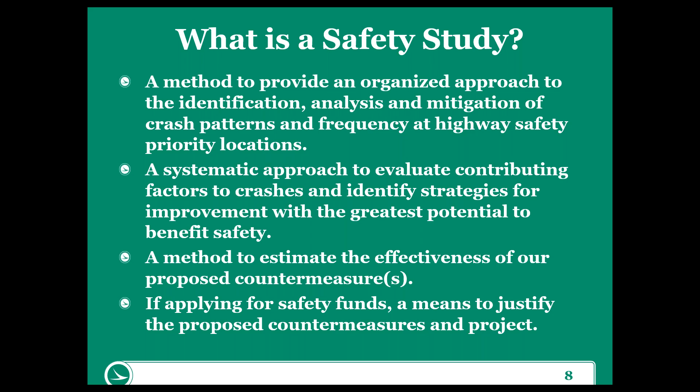And really importantly, if you're going to be applying for safety funds, the safety study really provides that means or that backup, that justification for the safety funding specific to the proposed countermeasures and the project that will move forward into the next stages of project development.

So the procedure for safety studies, this really applies to all studies. The first is to start with identifying your problem and your goal. So typically speaking, when you're dealing with an ODOT study, this is going to be something that's identified either by an ODOT district or someone in the central office safety program, but it can also be something that's identified by an MPO or local government. But really what it needs to be is an area of safety concern with a documented level of safety issue associated with the actual location.

Once you identify your problem and the goal, what you're trying to essentially address, then it moves into that study area definition process. It's really important for us to capture the appropriate study area so that we have a fair comparison of the existing condition to any proposed improvements we might implement. And most importantly, the direct safety impacts of those proposed improvements are important to capture.

This all usually starts with a startup meeting with the district safety review team. The district safety review team is that multidisciplinary committee within ODOT that is going to guide and ultimately will serve to review and approve the recommendations of the safety study. Coordination with the DSRT, and most importantly, if you're an LPA or an MPO, with that local safety coordinator is very, very critical at the beginning of the project, because that's how you're going to set the stage for the district safety team's support of the particular project as you move it forward and get it in front of ODOT for potential approval for some safety funding.

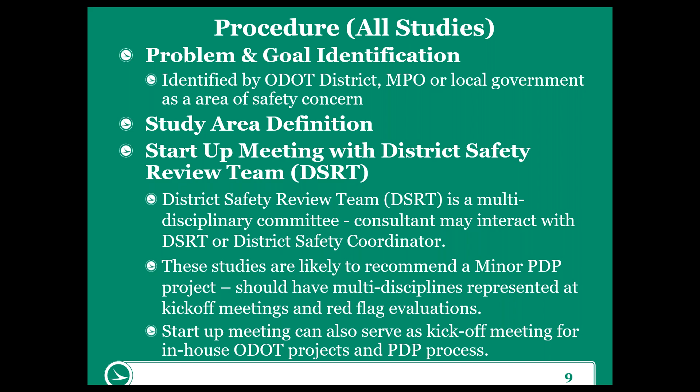What you're going to want to do when you're developing that scope is identify if this is going to be a full or an abbreviated safety study, and this is determined generally by the ODOT district that you're involved with or will be involved with. Please do always coordinate. If you're doing a project for ODOT, that coordination will start from the beginning. But if you're working from an MPO or a local public agency, this is another reason why it's really important to coordinate with ODOT, because you want to make sure that you understand if there have been any previous studies done before. And in certain cases, if there have been, then that might guide the actual scope in terms of whether it's a full or abbreviated study that ODOT really needs to see in order to move forward to make more decisions.

You'll review with that team the study area. You'll then also request the crash data, or in this case, you won't really be requesting it. You have the access to it through ODOT's systems now, so pretty much anybody can get that crash data. But what you will want to do is confirm very early what years of data you need, because as we know, there's some reasons why in some areas we don't include certain parts of data and certain years of data.

Right now, the COVID situation is a big one. In some areas, ODOT is suggesting that year of data 2020 be skipped. There also may be other reasons why you would provide a different number of years of data in terms of the 3-year grouping. Perhaps there was a construction project in the vicinity of the area that you're going to study that could affect the crash data. So you need to have that kind of information, and you need to coordinate that with ODOT, in particular, just to confirm as you're starting that you have the right 3 years of data. And in some cases, up to 5 years of data might be used.

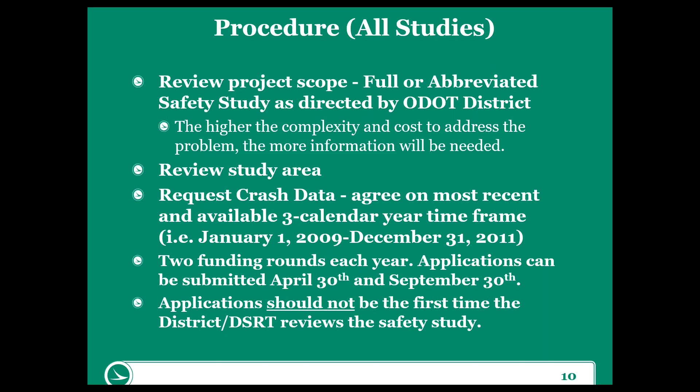Some of these projects are perhaps not on ODOT's safety priority list or are a local priority. The district review team needs to be involved early and often to provide the greatest chance of success in getting that safety funding, and they can't see it as of April 30th or September 30th for the first time. So like I mentioned, if seeking ODOT funds, contact the district safety coordinator to verify the level of effort and schedule for submitting that study and application.

Another point to make, every district is different. So don't assume because you've done a study in District 12 that the schedule District 12 follows is what District 7 might follow. It's really important that you talk to the specific safety coordinator at the district to make sure that you understand what that schedule needs to be. Typically, what we say is that the study should be received by the district at least 3 months prior to the application deadline to provide enough time for

and those submittal deadlines are really April 30th and September 30th, so you can see why we need to back up those dates. You can't be submitting it to district on those dates because that's when they need to turn it around to central office. So you need to back up at least a month ahead of time you're submitting your final study to district so that they can make sure all the T's are crossed and I's are dotted and they're comfortable with the recommendations. And then there's at least a couple months ahead of that that you should be coordinating at a minimum with district. The important thing is consult early and often with district.

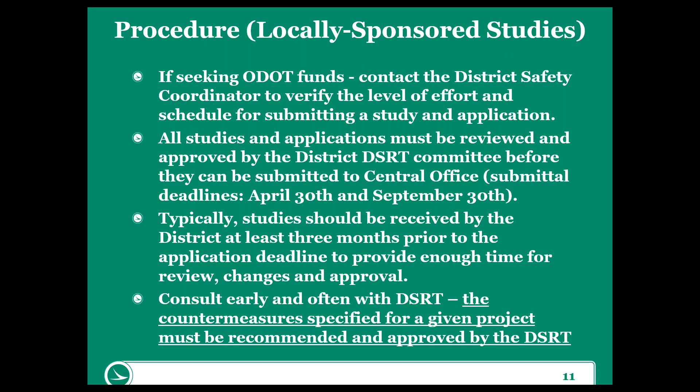They have a great partnership with the local public agencies and really want to share their funding with local agencies. So it should be considered an opportunity to make sure that whatever recommendations come out of any study are supported by the DSRT. And that same recommendation applies also for any sort of studies you're doing for the district. The district safety coordinator is there for your support and your help with them throughout the study development process, because then when it gets to that review time, it's much easier for them to review and approve it, particularly if they're reviewing multiple applications at the same time.

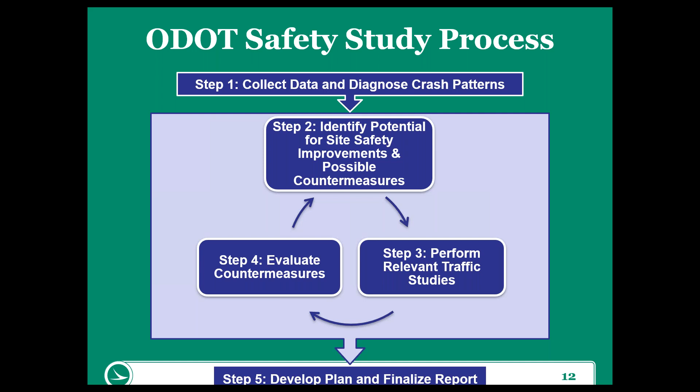So let's continue a little bit more. Again, this is what we're going to touch on today. We're going to go through all of these steps between Alex and myself. We will hopefully hit every single one very thoroughly, and you'll have a confidence level coming out of this course that you can develop a safety study that will be received well by district and by central office.

Another thing I want to point out is throughout the course of this presentation, there will be links shown when appropriate at the bottom of the slides, and those provide you the current link to the page where you can find this information. As you know, ODOT has made changes and updates to their website over the past several years, and sometimes we've bookmarked things and we go back and try to find those locations and we can't. So we've tried to make sure that at least at this snapshot in time, the pages you see on the screen and the things we're talking about, you can find them fairly quickly. You might have to type them in unless you can convert that quickly to some text, like if you have the PDF, but at least you have that link and you can get straight to where you need to be.

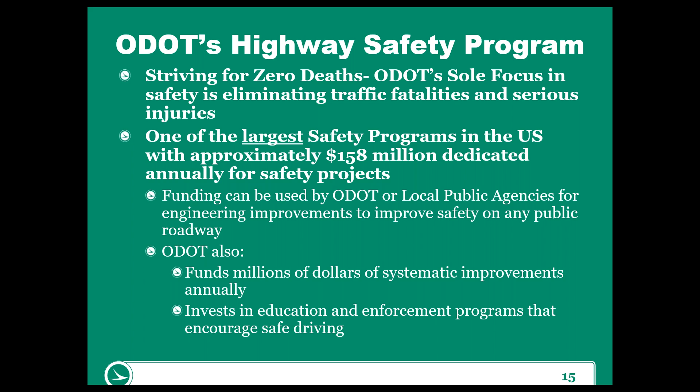A little more background: Ohio's fatalities have traditionally trended down for the past several decades, which is a real win. In fact, in 2013, Ohio had 990 traffic fatalities, which is the lowest number of fatalities since 1936, when ODOT began maintaining records, and shows the success of their safety program. However, from 2014 through 2019, serious injuries continued to trend down, but fatalities have started to rise. There's a lot of potential reasons, but we don't know exactly why that is happening.

But part of it is, they've had a very successful program. So the investments that they've made have really had an impact, and they've taken some of those big heavy hitter issues out of play, and so they're seeing that impact.

And so the effectiveness of some of their treatments has changed a little bit over time, which is natural. If you make progress towards reducing fatalities, that's a good thing. So you're going to see those trends change a little bit.

But we do have a few other things at play. We have a lot of newer, safer vehicles. So what that means is the severity of crashes is going down. If you look at from 2014 to 2019, the serious injuries, that's really a direct result in part because of the safer vehicles.

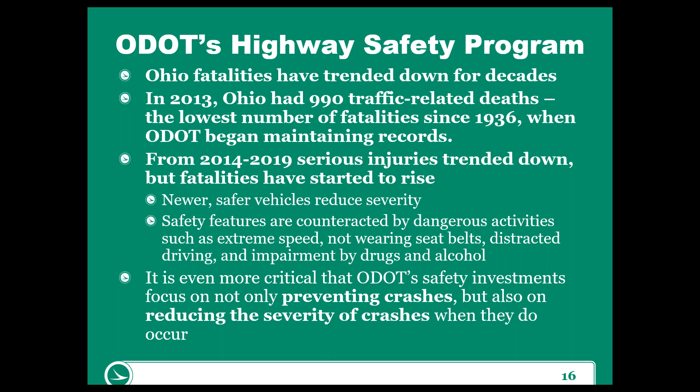So our job is that much more challenging. We have to try to counteract the behavior of individuals, but we also want to make sure that we're building into our environment, into our roadway systems, treatments that not only prevent crashes, but also minimize the impact of crashes.

And one of the methods that they have decided to use to get them a little bit closer, to move them to that point where they can walk away and say, hey, we have done a great job and nobody's getting hurt on our roadways, is to use the Highway Safety Manual.

The Highway Safety Manual is something that has come about over the past 10 to 15 years. It is providing some technical background on what we call the basic science of crashes. It gives you an overview and information on safety management methods and approaches. So it's helping DOTs guide their safety management practices all the way from identification of priority locations through to the implementation and construction of projects.

It gives us now some methodologies for predicting crashes. Why is this important? Because for many, many years, we had to use crash rates, which look back in order to get a sense of what a potential impact might be for an improvement. But as you're probably thinking, how can you decide what's going to happen when you change something and make something new from information that's in the past and has to do with the old condition? Yeah, that was a challenge.

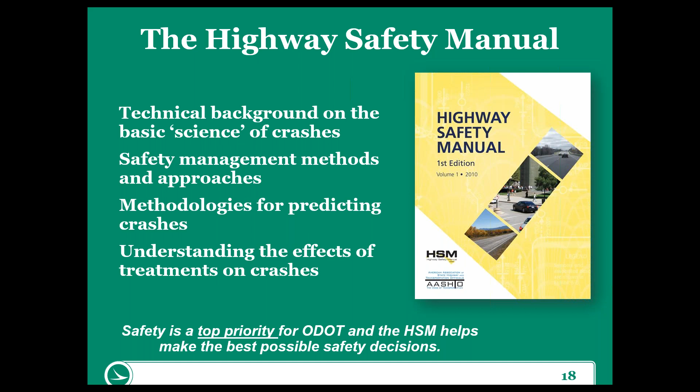Overall safety is the top priority for ODOT, and the HSM is the tool that helps them make the best possible safety decisions. This is something you just need to be aware of.

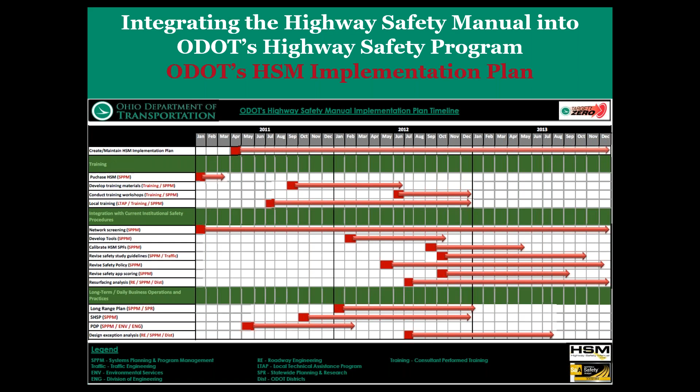When ODOT decided to implement the Highway Safety Manual into their program, they had a very comprehensive plan. The good news is it's been very effectively implemented throughout the majority of the program. In fact, in 2010, ODOT was one of the first states to use the HSM, and also the AASHTO SafetyAnalyst, which is based on the HSM, to prioritize and identify their HSIP priority locations for their studies and funding.

In 2012 - and think about that, that's nine years ago - HSM was incorporated into ODOT's Traffic Academy training.

One of the things I didn't get a chance to do was give my background because of the glitch we had. But just to give you a perspective of where I came from, I've been in transportation, traffic engineering, and highway safety for at least 20 years.

For the past 12 years, I've been working with folks implementing the Highway Safety Manual across the country. I've been involved in HSM training almost since the beginning for ODOT, who have had training courses on the HSM and have been incorporating it throughout their program for close to 10 years now - I've been involved for at least the past 6 or 7. This has been a really strong initiative for ODOT, and we've been doing this Traffic Academy training for quite some time, and I'm pretty excited that it continues to grow.

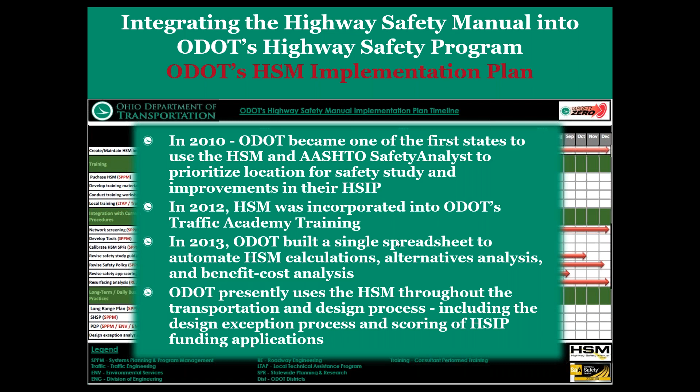For ODOT's safety program priority locations, most of us are familiar with the lists we've seen. ODOT focuses on sites with the most potential to benefit from a safety improvement. They use the Highway Safety Manual to estimate that potential, screening all locations on their system and using the HSM's methods to predict crashes - based on the design that's out there, determining what we'd predict we should be seeing in terms of crashes, and comparing that to what's actually happening. That's how they determine the potential for safety improvement at all those locations.

They think very positively about their program. Locations are identified as priorities because they know that with the right improvements and treatments, there is a real potential to reduce crashes in the future.

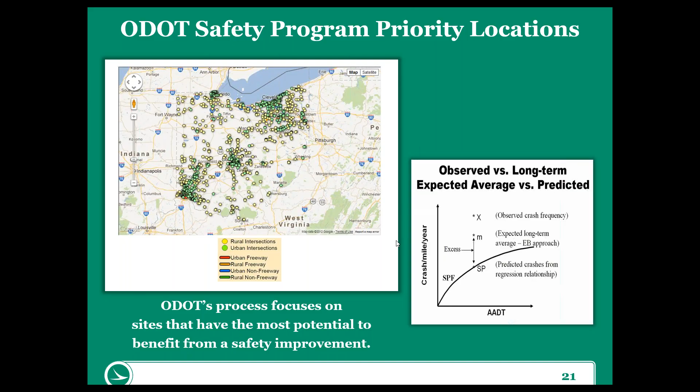Clearly, developing the future lists and new lists has been a challenge because of COVID. But there's also the new location that contains all of the new information on the program and the safety priority locations. What is not there is their highway safety priority list, or at least it wasn't there two days ago when we were looking at this. That information, I'm sure, will transfer over and they'll have it updated at some point in the future. But in the meantime, if you're looking for or wanting to confirm you have the latest lists, definitely reach out to your district safety coordinator.

You can also reach out to the folks at central office as well. My recommendation is always to contact the district safety coordinator first. Give them the first opportunity to give you the information you need, but you can always CC or copy central office so they're in the loop as to what you're requesting.

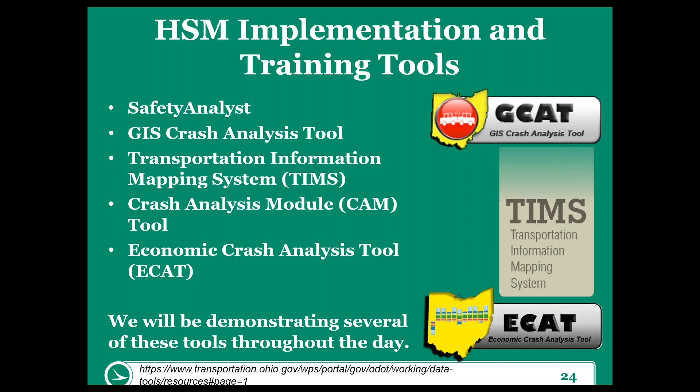As you're going into preliminary engineering and design, you need to use it to refine and identify key elements of the design. For environmental engineering, it can help you with the NEPA process and documenting the purpose and need, and also documenting the choice of alternatives given the potential environmental impacts and other impacts.

And then in final engineering, it's also going to help you further design and refine the design, and do things like value engineering and those types of things.

Now in construction, it does apply, because for those of you more on the design side, just because a project's in construction doesn't mean you can't use or find a way to use the highway safety manual and the safety analysis. If there's a proposed change in construction that might affect design, it's very important that the design engineers and construction engineers go back and verify the reason the decisions were made during the planning and design process, because some of those decisions are influenced by the safety components and safety aspects.

And if you're going to change something when you get to the actual built environment, it could very much have an impact on safety performance and on what you might expect to happen at that site in the future. So anybody who works in the area of design refinements when we get to the construction stage should be aware that the HSM is definitely relevant and informative in helping you develop those next steps for making changes in construction.

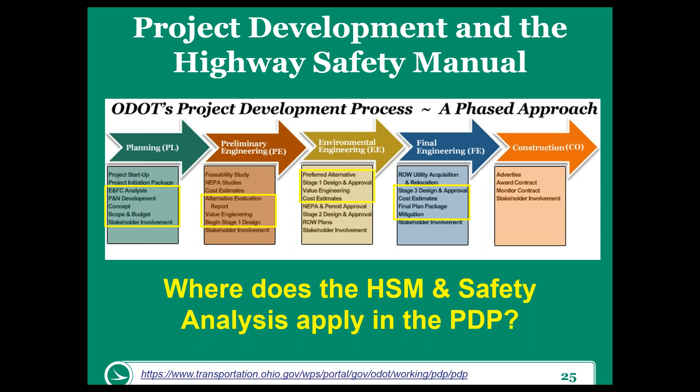So again, where does it apply in the study process? It applies everywhere. The HSM applies when we're thinking about collecting data and diagnosing crash patterns. We definitely need to know what data we need in order to do analysis. So when we're collecting the data, we need to be aware.

It helps us diagnose crash patterns. It's very helpful to see what might be expected at that site in terms of the distribution and types of crashes compared to what's actually happening. When you're getting to the point of identifying the potential for site safety improvements and possible countermeasures, it's giving you some hints and indications on the things that might be most effective. And then most importantly, it tells you what the effectiveness of those potential options are.

When you're performing your relevant traffic studies, you need to keep the HSM in mind as to what you need in order to support the decisions that are being made based on safety. Evaluating countermeasures is similar to identifying potential and possible countermeasures. This is when you get to that final evaluation of your proposed improvements. And then finally, it's woven throughout the development of the plan, the safety study, and finalizing the report. It's very critical that you keep the HSM in mind.

It's a perfect tool for helping you quantify potential impacts, talk about those impacts, and in the last module of this series, we'll talk a little bit more about how you can communicate things more effectively, and the HSM is a great tool for doing that as well.

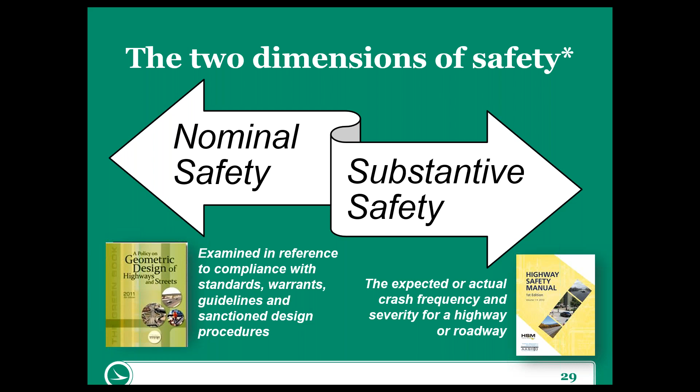So what it considers is that expected or actual crash frequency and severity for the highway or roadway that you're actually looking at, based on the volume, where it's located, the context of that particular design. And it allows us to get much more granular than just a simple yes or no, does something meet a standard or not?

You're going along at a certain presumed level of crash risk, boom, you hit that point in time when you meet that design standard, and then you fall off that cliff and you don't have any crash risk, or have a lot less crash risk, moving forward.

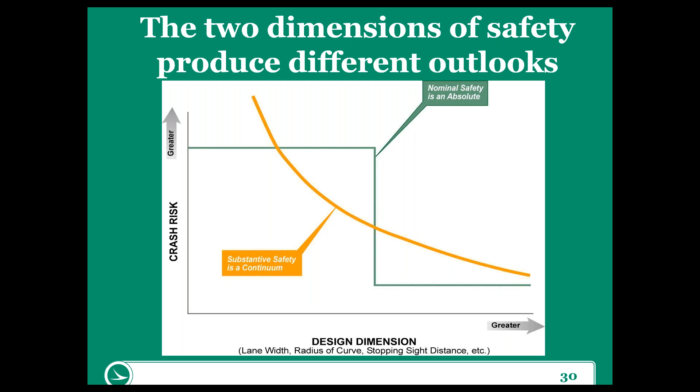Well, that's not reality. The reality is there's a difference in crash risk between a 12-foot, an 11-foot, a 10-foot lane width, and we need to be able to understand that in order to have the most effective and comprehensively formulated design for our proposed improvements, that we hope actually results in a short-term and long-term reduction in crashes and improvement in safety.

So we would expect in this situation to see a lot of different types of crashes, but most likely the most predominant would be the roadway departure, run off the road, lane departure types of crashes. We would also expect in this type of environment to see higher speed related crashes, because these roadways typically have higher speed limits because they're rural. In Ohio, we know that outside of certain municipal areas, there are Ohio Revised Code requirements for the speeds on roads like this. So we know that they tend to be on the higher side.

And typically speaking, if you were to see someone run off the road at a high speed on one of these types of roadway locations, you'd probably expect to see the severities a little bit higher than other locations that have a lower speed and maybe don't have the same type of roadway environment. So clearly, you can see substantive safety and safety in general is very context sensitive.

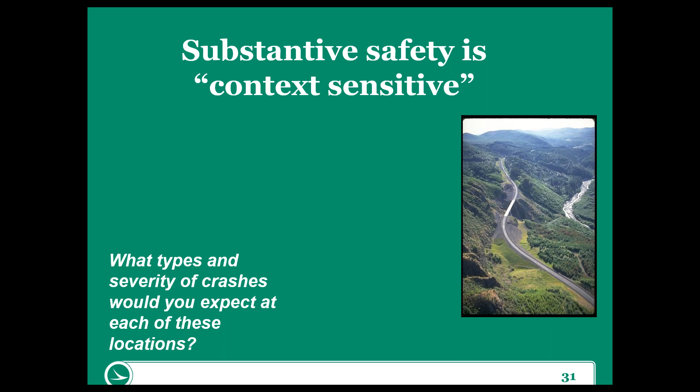We're going to see a very different mix of vehicles. And probably, for the most part, with the exception of those pedestrian and bike crashes, we're going to see a lot lower severity. We're going to see a lot more property damage only crashes when things happen, and a lot lower severity in terms of the impacts in the vehicular crashes.

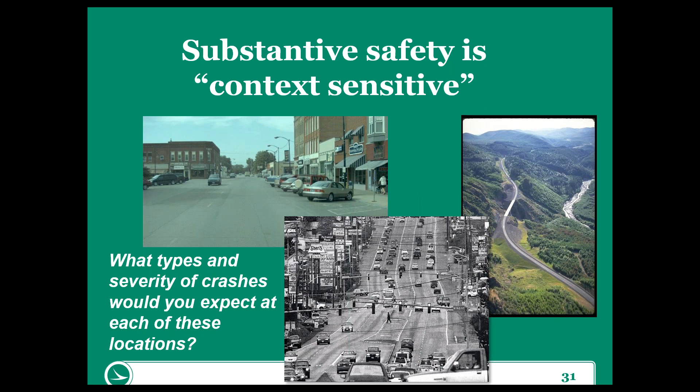Again, more information. Why do we care? Well, a good decision is an informed decision. And as engineers and planners and transportation professionals, we all appreciate that an informed decision really requires data. In fact, most of us are not comfortable in making solid design decisions unless we have some data to back it up. Yes, we use engineering judgment all the time, but typically engineering judgment is based on experience, and it's based on some sort of evaluation of data or information that we've had or used elsewhere. So again, an informed decision and a good decision really does require data.

There's also this kind of implied level of importance. When you have more data and you have more detail and you can get more granular in your analysis, you really have this larger amount of comfort. And so then you put a little bit more importance, a little bit more weight on that information when you're making decisions, you would put a little more weight on those points that have more data.

In the past, all we had for safety was crash rates and design standards. So historically, with the crash data itself, all we could do was look backwards. And as far as looking forwards, all we could do was look at design standards. And like we just talked about, design standards tell us something, but they don't tell us enough. In fact, the reality is a lot of design standards are not based on safety as a primary decision point. We would have hoped that they were, but the reality is they weren't. A lot of design standards are based on the ability for people to operate a vehicle comfortably, but not necessarily consideration of safety within the decision-making process.

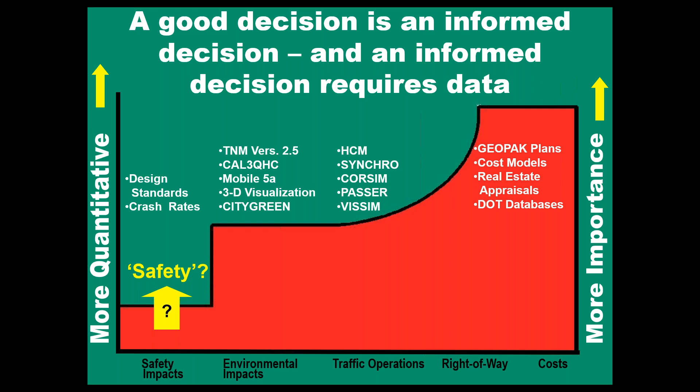But as you look at this kind of graph, you could see moving from left to right, as we get further into the design process, we have more and more detail. We can get more and more honed in on the accuracy of things, and therefore there's an implied increase in the level of importance. So isn't it great that now we can get safety up to that point in the planning and decision-making process, that we can weigh it fairly and equally amongst all of those other planning and design tools that we currently have to help us make those design decisions.

So some typical decisions that impact safety, aside from really saying that everything does, let's break it down a little bit in more detail. We use safety in determining which projects to do and not to do. Frankly, one of the elements that we consider is whether or not there's going to be an improvement or potentially a detriment to safety. So that really helps us make those decisions. When we're dealing with things like alignment and cross-section, we want to make sure that what we're proposing makes the most sense in terms of safety as well.

Intersection improvements: we often add turn lanes, we change our traffic control, we install things like roundabouts, and those are the things that influence safety. Roadside improvements, where things are placed on the side of the roadway when someone leaves the roadway. Thinking back to that picture of the rural 2-lane, it sure does make a difference what's along the roadway in terms of whether a person who leaves that roadway might be able to recover and get back on the roadway, or will strike an object and a potential safety concern.

Traffic signals, permissive protected signal phasing versus protected only, right turns on red, access management. There's always that competing interest of allowing full access movements against the fact that people and cars are crossing in opposing directions on busy roads. And so we're always discussing safety and weighing the benefits and the negatives, and design exceptions themselves. We use that very frequently, and ODOT actually has a process in place.

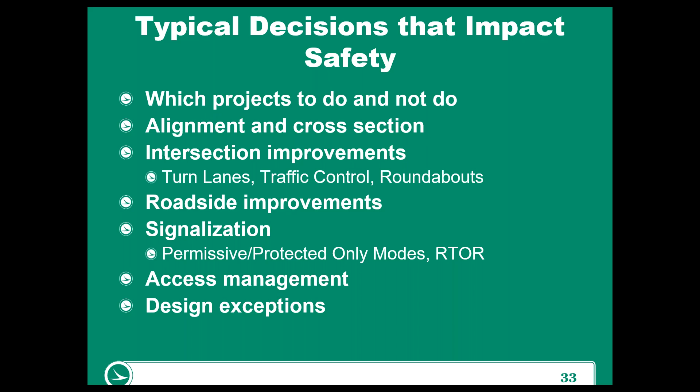Quantitative tools do help us make informed decisions. We're used to using them in planning, like the trip generation manual or the traffic noise model. When we're doing our environmental impacts, we can use the highway capacity manual the same way in the early stages and throughout all of project development, because it really provides us with some models of traffic operations for all types of facilities.

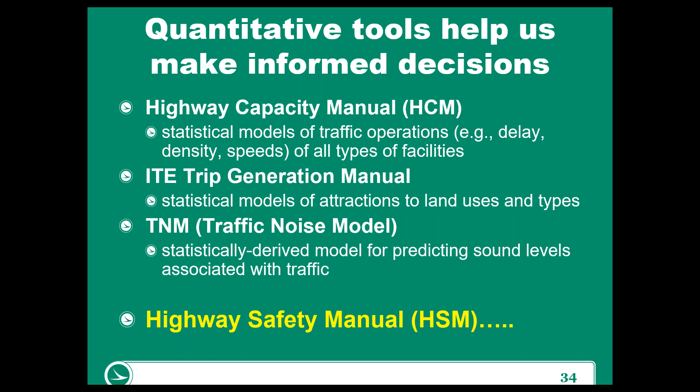The highway capacity manual gives us the statistical models of traffic operations of all types of facilities. And the HSM is a similar tool that gives us models that allow us to predict safety performance and crash rates for our facilities. So we can use this as a quantitative tool to help us make those informed decisions. It probably makes sense if I tell you that the highway safety manual was intended to be something like the highway capacity manual.

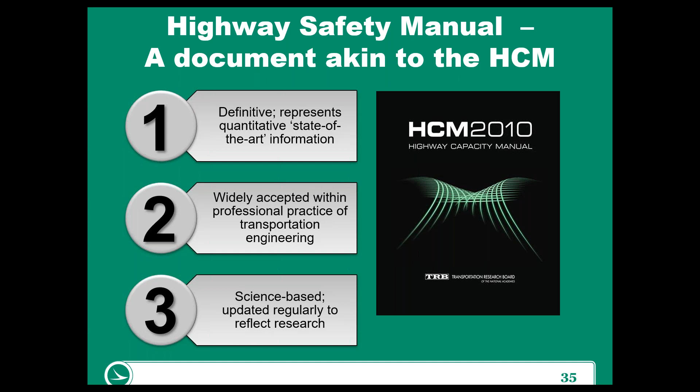In fact, the folks who generated the idea for the highway safety manual were sitting around a table at a national conference on transportation and said, hey, we really need something like the highway capacity manual for safety. We need a resource that summarizes all of the best research in safety, provides some general guidance on how to use that research to evaluate safety performance throughout the project development process and through planning and program management, and takes the best of the best research and puts it forth for use by the transportation industry.

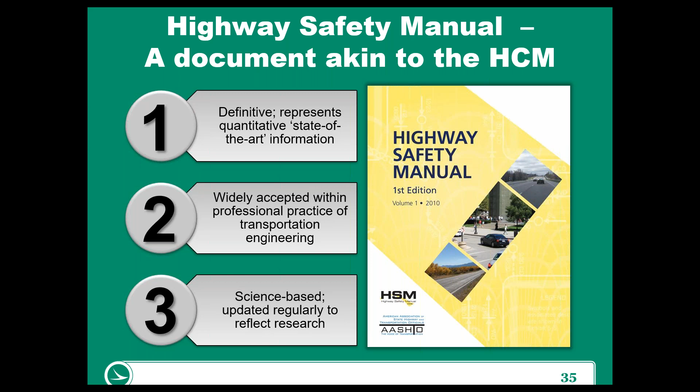There's a lot of research out there, and not all of it's great. So they recognized that there needed to be one compendium, a summary guidance document that transportation professionals could use, just like they were using the highway capacity manual. The highway safety manual is a synthesis of previous research. There was some new research commissioned by AASHTO and FHWA, and it's good to know some Ohio data was used in multiple research topics included in the highway safety manual. So we're represented within that research.

Why are we doing this, and why are we moving away from crash rate? Well, as we mentioned earlier, adherence to design criteria really tells us nothing about safety performance. There's no way those manuals themselves figure out what the impact on safety performance is going to be from changes in our design. Crash rate as a benchmark for decisions is really not correct. We know volume effects are nonlinear, so crash rate bias favors lower volume roads. So it's one of those things we've got to do better, and the HSM allows us to do better.

And we see a big difference in estimating expected crashes because we know that they vary by number of lanes for the same highway type. It's not just that they differ by the highway type itself, like we were talking about in the context sensitive discussion; it also differs by the number of lanes for the same highway type. There are a whole bunch of other reasons why crash rates aren't the best tool. It doesn't mean that there isn't a place for crash rates. Crash rates are very useful when applied in the right context.

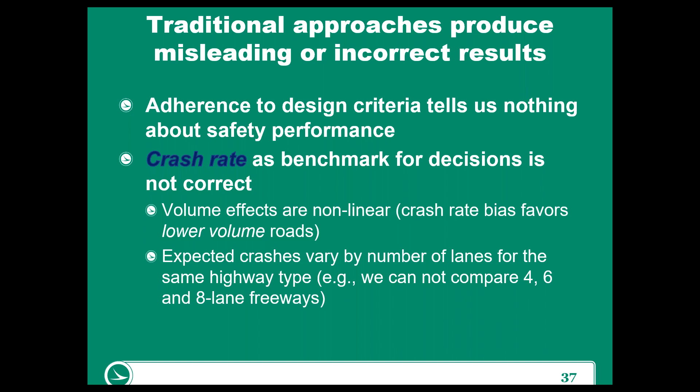For the HSM and the science of safety, this new concept and understanding of crashes in the HSM allows us to understand that focusing on crash frequency and expected...

use of best practices. We'll talk about that a little more later, but it boils down to this: we only typically look at 3 to 5 years of data. That may not be the right representation for the long-term performance of the location we're looking at, so it's really difficult to make good data-driven decisions based on that kind of information.

The Highway Safety Manual does break things down by things like single vehicle, multi-vehicle, pedestrian, looks at things by severity, and looks at things by crash type. That's the information we need when we're trying to target improvements that have the biggest potential to benefit safety.

And then, with the Highway Safety Manual, it allows us to predict crashes based on our actions and the changes that we propose. We do this because we can use research based on the proven effects of roadway geometry and dimensions on crash frequency changes, and we can use that to help us evaluate what we might propose as a future improvement.

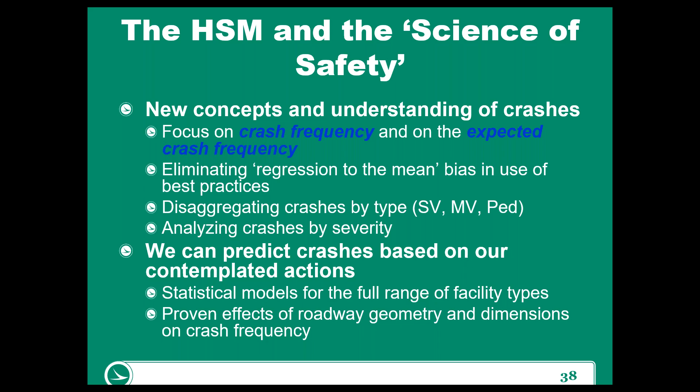crash frequency is the basic measure of crashes that we use in the HSM, and it's usually expressed as the number of crashes per year. It's most frequently expressed for a location or site. So comprehensively, if we're looking at a project, we would be able to estimate crashes per year for that entire project area.

But we can also estimate crashes per year for individual components - it could be intersections, segments, or subsections within our project area. We can look at it in different ways, so we can identify when there are safety issues, what the true source of that issue is, or what we suspect it might be, and that helps us nail down where we want to focus our improvements.

Sometimes we represent things on a per-mile basis to help provide perspective. This is sometimes helpful when dealing with segments, and especially helpful when dealing with ramp segments, because different ramps, depending on their length, may have completely different total crash frequencies because of the length. But when comparing those things, we really need to relate them back to a common variable, and sometimes that common variable is per mile, or the length of the individual segment we're looking at.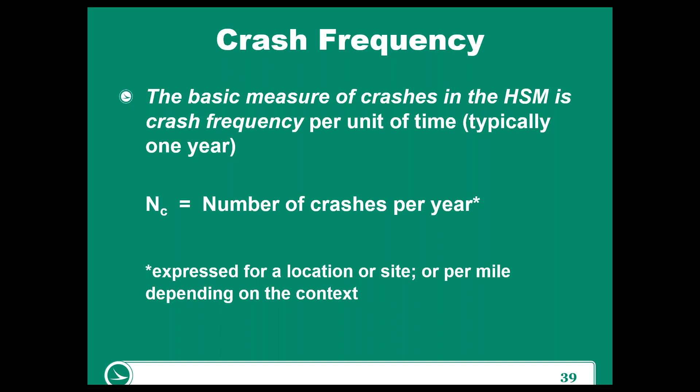So there are 4 parts to the HSM - Part A, B, C, and D. Each part brings value to the work of transportation professionals. The first edition of the Highway Safety Manual has 17 chapters and 3 volumes, and then 2 more primary chapters were introduced in a supplement issued in 2014.

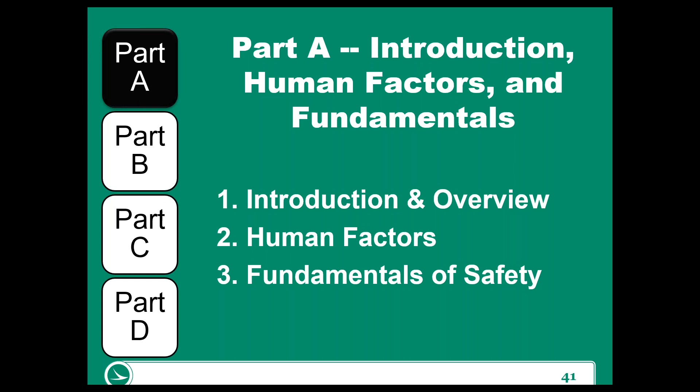In Part A, the first 3 chapters of the first volume of the Highway Safety Manual cover, in general, human factors and safety fundamentals. There have been other resource documents developed as complementary to the Highway Safety Manual regarding human factors, but the HSM does provide an overview of the human factors component in the first 3 chapters. One of the big things we alluded to earlier is this relationship between the roadway, the driver, and the vehicle.

We know there have been significant changes in vehicle safety since 1979. Every vehicle now produced has an airbag. Every vehicle now produced has seatbelts. Almost every vehicle, but they should, has seatbelts unless it's a special situation. So we've got a lot of difference in the safety of vehicles.

Safety of roadways, same thing. We've got to think about the way roadways were built. The original system in place in 1979 was built for a different series of vehicles that went a lot slower and had different operational characteristics. It was built for a different set of guidance in terms of speeds. Our roadway system was considerably different back in 1979 than it is now. We've made considerable improvements in the roadway environment.

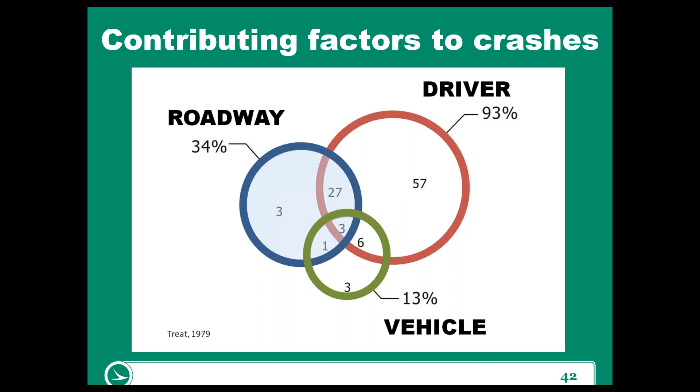It's not enough just to put that design down on paper and say it meets design exceptions. We all have an obligation to step back and say, could I drive that corridor? Could I drive that intersection? And would I feel comfortable? And would everything make sense to me? Because that's very important, very important.

So in Part B of the road safety management process, there are 6 chapters, chapters 4 through 9. This is the area primarily covered by Michelle and Derek's office. It's the network screening from a network system perspective, some of that diagnosis and countermeasure selection from that system-wide implementation perspective. It guides that economic appraisal and prioritization, the STIP and those kinds of things when they're actually looking at their program in general.

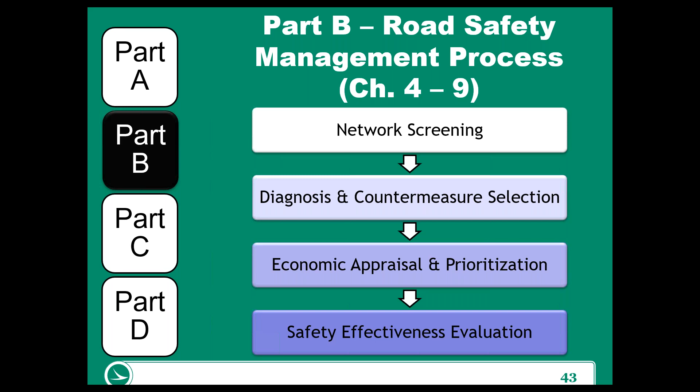The road safety management process contributes to that. And then also after everything's done and complete and they've implemented treatments, they are still obligated to go back. In order to continue to get federal funds in safety, they're obligated to go back and evaluate whether or not their program's been effective. And so that is what's covered by Michelle's group, in particular.

They have utilized a tool called Safety Analyst. What that tool did was use basic principles of the Highway Safety Manual to predict what they would anticipate their roadway environment safety performance would look like based on the design conditions that they knew existed on the system, and then compare that to what was actually happening. We didn't have that tool prior to 2010, and it really helped us dial in on the locations that we needed to study the most.

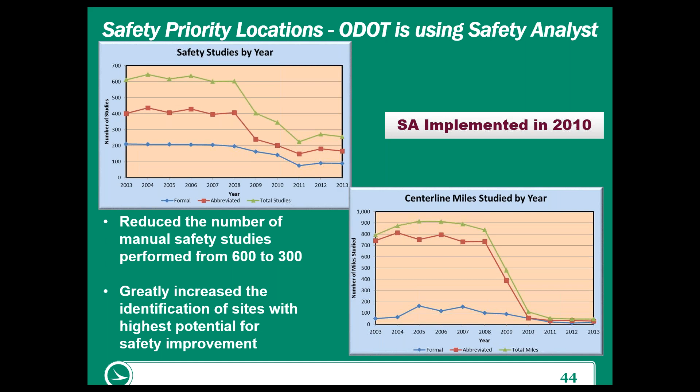So it reduced the number of manual studies in that period, shortly between 2010 and 2013, from on average 600 per year to 300 per year. But what in turn it did was greatly increase the identification of sites with the highest potential for safety improvement. So we were not only doing fewer studies, we were hitting more of the high fatality, high severity crash locations within that 300 than we ever did before at the 600 studies per year. So it was a pretty cool effect.

It was really a great impact by the implementation of Safety Analyst, and they've been using that ever since. If you spend some time looking at these graphs and see what they're saying, it really shows Safety Analyst was a great tool to help ODOT hone in on where they needed to treat for safety the most on the system.

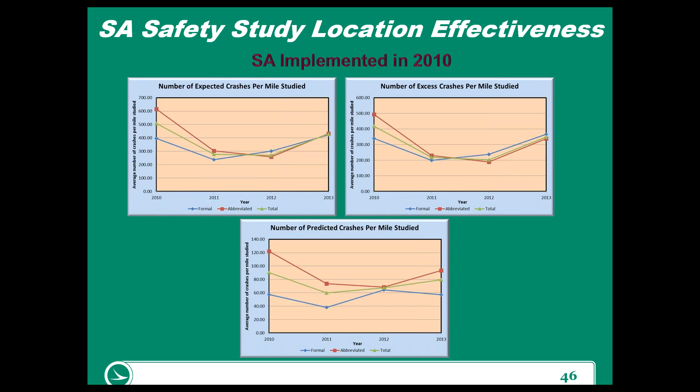Part C is actually the entirety of the second volume of the HSM, and it also includes that supplement I mentioned. What's in Part C is that predictive methodology, those tools that we have to help us in the planning and the design. So we have safety performance functions, which are models to predict crashes. We have some crash modification factors, which in the context of Part C - what those are, I will explain - relate to the next edition of the Highway Safety Manual that's going to be coming out in a couple years.

They're probably going to change this reference and how this is termed in Part C, but what that really means is, if we have a model that tells us what our site might look like under a certain set of generic conditions, those crash modifications help us change the results of that model to be a little closer to what we actually have. So that's what the predictive methodology allows us to do.

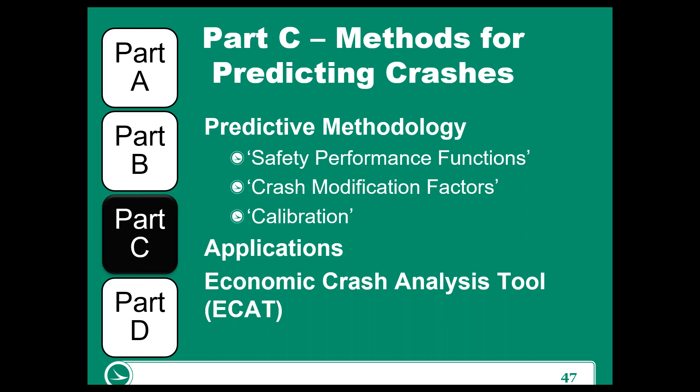Also covered in the predictive methodology is how states can calibrate what's in the Highway Safety Manual to their own state. It goes over several applications, and then the Economic Crash Analysis Tool, ECAT, is basically based on Part C and includes all of the models from Part C.

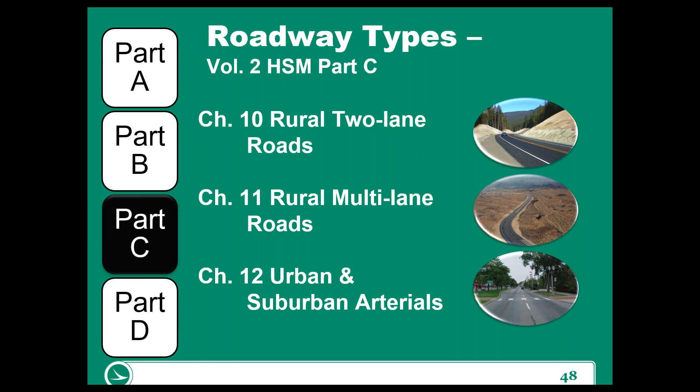In Volume 2, which is that second volume of the Highway Safety Manual, there are 3 basic roadway types covered: rural 2-lane, rural multi-lane, and urban and suburban arterial type roadway systems. In the 2014 supplement I've referred to, there are also 2 additional chapters: Chapter 18 on freeways and basically freeway segments, and Chapter 19 on ramps, which includes freeway ramps and the ramp terminal intersections.

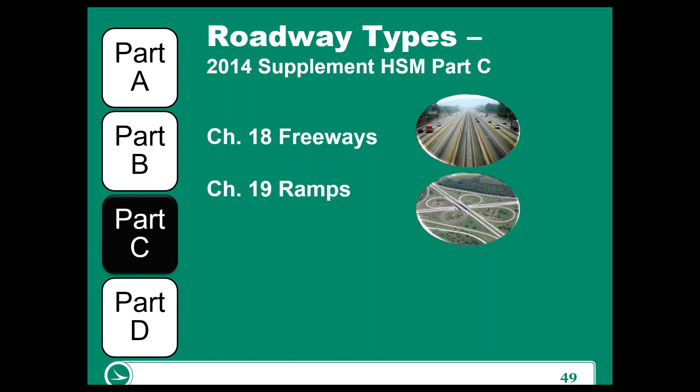So these are really helpful tools and chapters that allow us to do a considerable amount of evaluation of proposed design and improvements when we're doing our job here for the DOT and other local agencies.

In Part C, there is an appendix, which is the location of common procedures for all 3 chapters, plus the freeway and interchanges. In there, we learn about calibrating those to your specific jurisdiction, and then also this empirical Bayes process, which is really the behind-the-scenes analysis process used for predicting crashes.

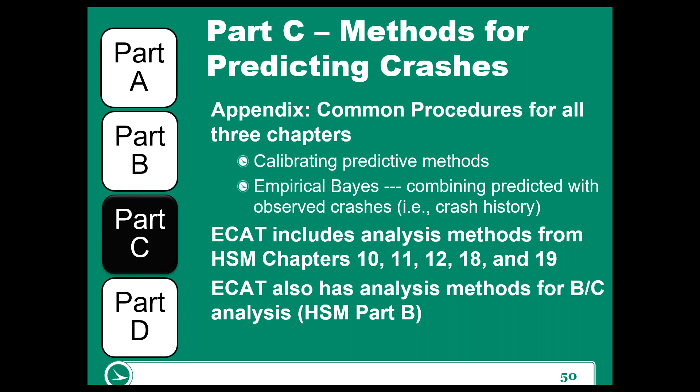ECAT does include analysis methods from these chapters that I just talked about, and also takes some select components of HSM Part B, the roadway safety management process, for the benefit cost analysis that's used in the ECAT tool, and that's incorporated as well.

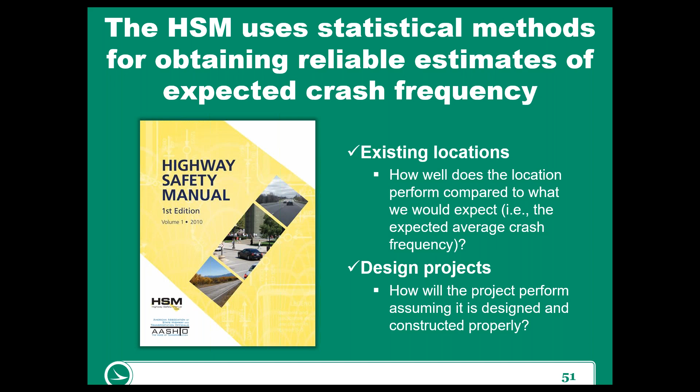So the HSM uses statistical methods for obtaining reliable estimates of crash frequency. Where can we use this? Well, we can use it at existing locations - it helps us determine how well the location performed compared to what we would expect. It also allows us to look at proposed and future design projects, to see how the project might perform, assuming it's designed and constructed properly, and I would say comprehensively as well.

So what do we get out of the HSM? We are able to estimate expected average crash frequency, which is associated with a particular geometric design, given time period, and specific traffic volume. It's very, very common.

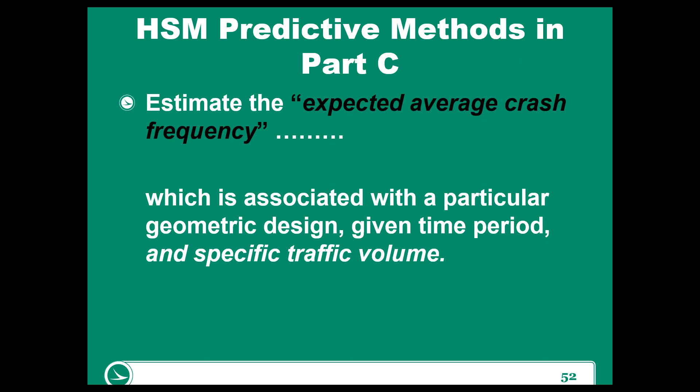Mathematical models based on high quality data from multiple states control what is called a regression to the mean bias, and we're going to talk about that here in a minute. It helps establish predictive relationships between a particular roadway type, like a rural 2-lane, and the different design components.

Components like lane width, shoulder type, offset to potential obstacles on the side of the road, if there's lighting or no lighting, for intersections, if there's turn lanes, if there's a protected signal phasing for left turns, or right turn lanes. Those are the kinds of things we're able to see with the predictive relationships in the HSM. And then it also incorporates that relationship of traffic volume to crash frequency.

In most cases it's curvilinear, it's a logarithmic type, it's a curve. But in a couple cases, it's still linear.

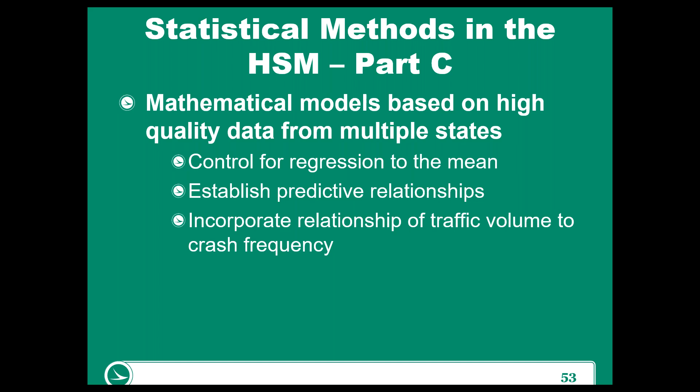How they do it is through these concepts that you'll hear a lot about if you go into the HSM: safety performance functions. Those are the basic models that tell you, if I'm going to have a rural 2-lane roadway, where do I start in terms of prediction based on the volume I have on my particular section.

Now it does assume some generic other criteria. For example, for a rural 2-lane, it might be 12-foot lanes with 6-foot paved shoulders, no roadway lighting. That's the condition you'd get your results for out of your safety performance function.

But what if you need to know what that predicted safety might be for that type of roadway, but you've got 11-foot lanes and 2-foot gravel shoulders? Well, that's where these crash modification factors come into play in the HSM Part C. That's how we get from that base model output to something that's as close to our location as we can, with the information available in the predictive models in HSM.

Calibration is specific to the state, and then incorporating observed crashes. That's where that empirical Bayes term comes in, and we'll go over it here.

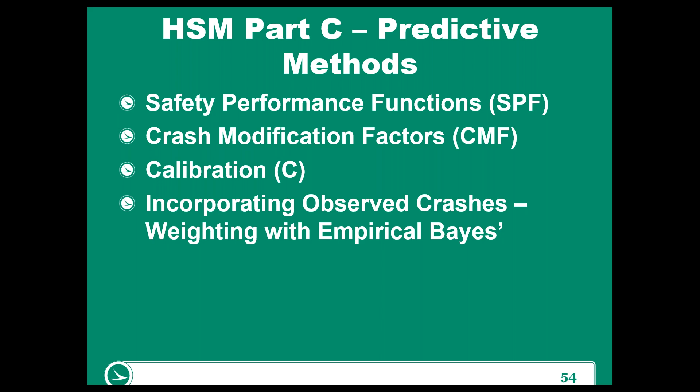But really, how it was developed is they collected data from multiple sites, plotted them, and that safety performance function is the best fit line that fits all of the locations for which they collected data when doing the research.

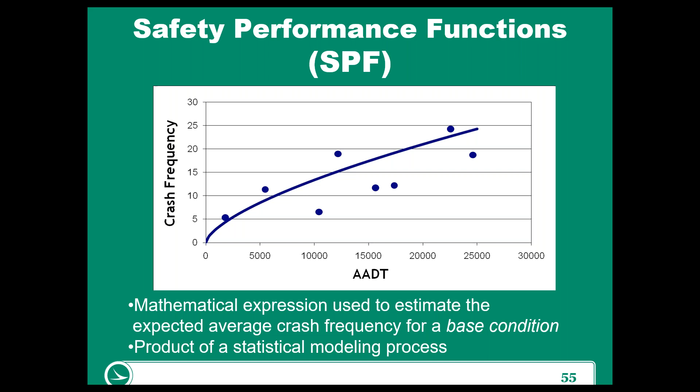It is used to express expected average crash frequency for a base condition, but it's the product of a statistical modeling process. There are separate models and functions for different roadway types, road segments versus intersections, and even types of intersections.

We can get data and output in terms of different crash severities and combinations of crash severities. And the base conditions in the HSM are those established in the modeling process.

And then the CMFs are the independent variables they identified that actually influenced and impacted safety for the specific roadway type.

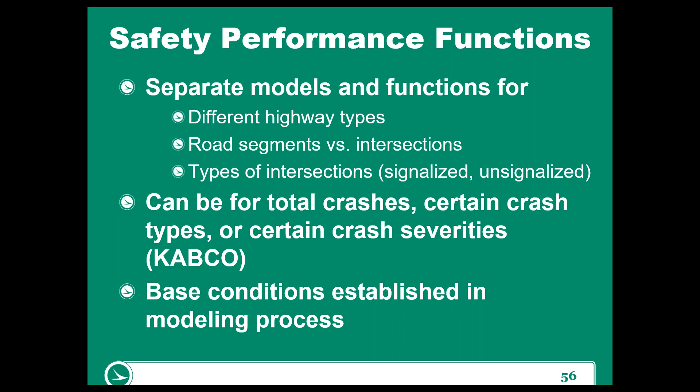The crash modification factors, again, what they're used for is to express a change in crashes when a factor or element is different from the base conditions. Like I said, 11-foot lanes.

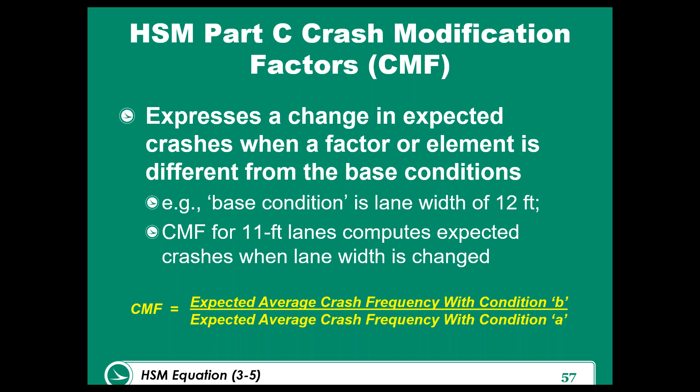This would give you an example of how you might get that CMF value, and what you would end up being able to use to convert from something like a 12-foot lane to an 11-foot lane.

And then this is the basic form of how the CMFs are applied. You have your predicted base model output, based on that safety performance function or equation for the base model. And then you apply all of the applicable CMFs that you can, in order to take it from that base output to something closer to your site.

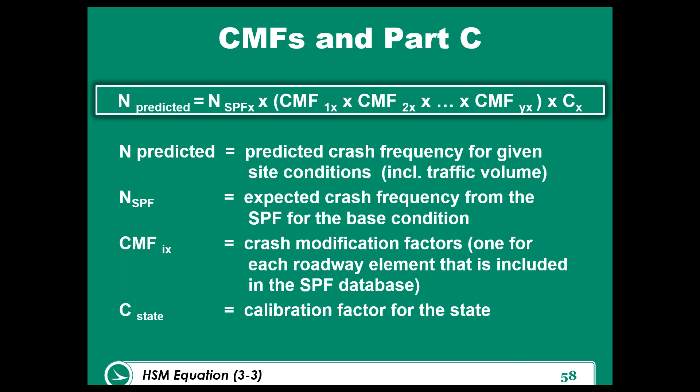And then, of course, if you can calibrate it, you want to calibrate it for the specific state that you're in.

So the Part C CMFs that we talk about, those crash adjustments that you make from the base model to your site, those are actually why they're called that and why they're incorporated into those chapters, is because those actual values were derived from the same modeling effort as the safety performance function. So those were the independent variables, like I mentioned before.

That they identified associated with the safety performance function that also influence safety. So if you change lane width, they knew, for all of the site types, changing lane width influenced safety. So that's one of the CMFs that you can use. You can change from the different lane widths within your roadway types.

But each of those series of CMFs is different based on the site type. So you can't assume that, for example, if driveway density impacts one, that it's going to impact another, or even if it impacts another, that it would the same way, because all of them were developed independently based on data for that particular roadway type. So they can only be applied in that same setting.

So if you get a CMF from Chapter 10, which is rural 2-lane, and you know that it has something to do with vertical grade or horizontal curve, you can't use those same CMFs for the other roadway types. You have to look within those chapters and find the CMFs that are applicable to those models and use those. And they're not always the same.

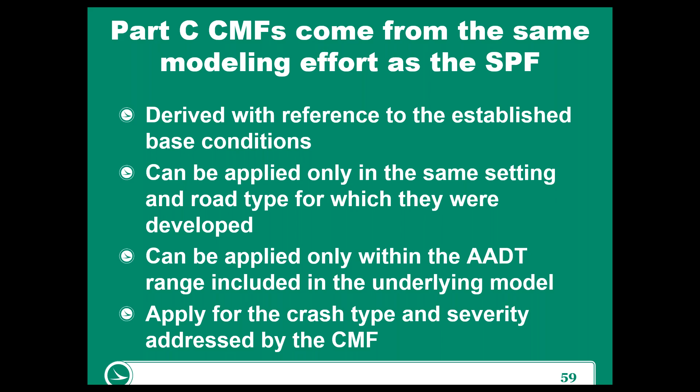That's a simple answer. And those CMFs only apply for the crash type and severity addressed by the CMF. Again, something that should be self-explanatory, or should be something that you understand when you get into the deep parts of the ECAT tool when doing your analysis. Alex will go over more of that in later modules.

So for calibration, all of the safety performance functions have calibration factors that can be developed because these SPFs and associated CMFs were developed from many different states' databases. In fact, the most predominant were Washington, California, and Maine.

If you look at those 3 states and think about Ohio, we're not like any 3 of them exactly. We probably have similarities with roads from all of them in some cases, and perhaps for some of our roadways in no cases. So we need to calibrate what was produced based on these analyses to make sure we can get as close as possible to what we'd expect to see on our system.

Relative comparisons are still possible if you don't have a calibrated model. So if there are any consultants here who work outside of Ohio and want to apply the Highway Safety Manual, you can still use it. You just have to understand that those models aren't calibrated. So what you'd want to do is use it to compare 2 different conditions instead of trying to capture exactly what the predicted crash frequency would be.

But it's still very useful to determine, say, if I'm going to go out and change this rural 2-lane and take the 10-foot lanes up to 12-foot lanes, what order of magnitude change might I expect to see? And that's still very, very helpful. It's better information than having no information at all in terms of helping you make your decisions.

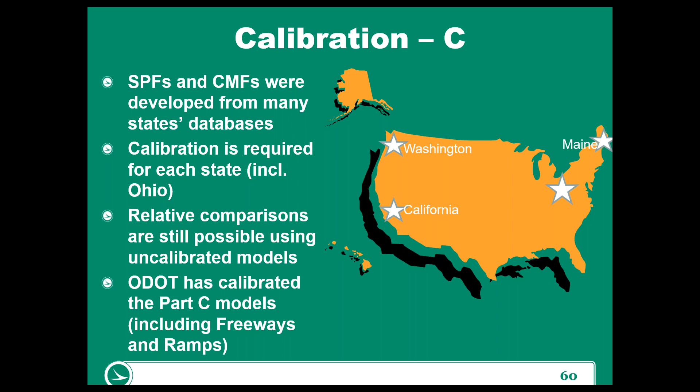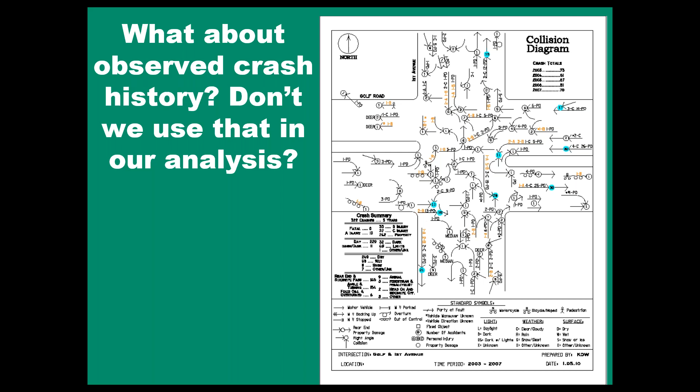But don't worry, ODOT has actually calibrated all of their models, so you don't really have to worry about that if you're working in Ohio. But we're talking about models. The reality is crashes and sites are still unique, and we probably can't capture everything that might be specific or unique about our sites within the results of those models. So what about the observed crash frequency? Don't we use that in our analysis? Absolutely. Yes, we do.

But why do we use both models and our crash data? Well, it's because there is a bit of a bias that exists when only crash history is used. So what ODOT wants to use is that combination. They want to use a combination of the model output and also our historical site data to come up with a value that allows us to evaluate that site considering not only our site, but a bunch of other sites like ours, so we can get the best results possible.

We are looking at a site often in these types of terms. We see a short-term trend. We try to identify something that could address perhaps that trend, which is an increase in crashes. But do we really know if over time we would have seen a continuation in that trend, or if that was just a 1 or 2 year fluke?

Well, that's the issue that we deal with when we're only using that 3 to 5 years of data. We might not be able to capture what the actual average crash frequency is for that site over a longer period of time, and we might make poor decisions or uninformed decisions. We might perceive the effectiveness of a treatment is more than it is because we are only basing it on short-term observations of crash data.

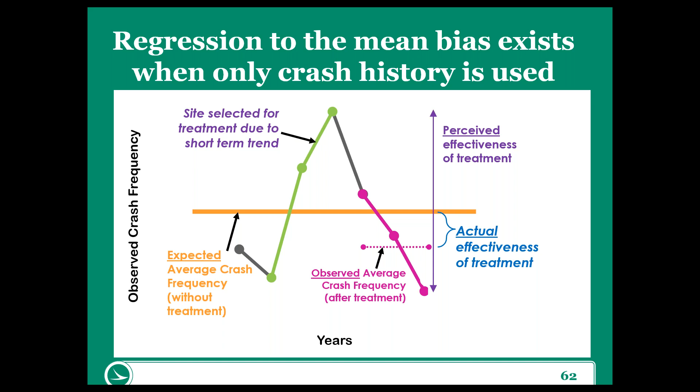So the process by which that's done is called site-specific empirical Bayes. That's going to reduce the effects of the regression to the mean bias. It's going to improve the crash frequency estimate. In this case, though, you do need an SPF from the HSM to make that work. I mean, that's probably common sense.

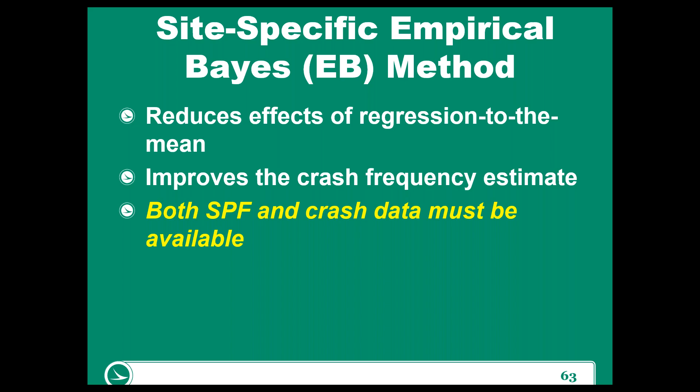You need that model to estimate what our site is like in other cases. But you also need crash data for our site, because what it does is it combines the results of the model with the actual crash data from the site in order to estimate what that expected value might be for our actual site.

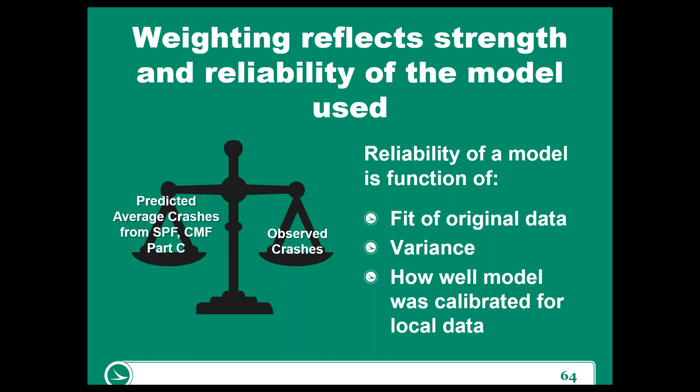And then weighting: we do weight based on the strength of the model. We combine those two values based on that. The weighting uses a statistical process that says, based on the strength of the model, we're going to emphasize more from the predicted or more from the observed, but basically that's all accounted for in the HSM process. And that'll be something we go over in more detail over the next few days.

But moving past that into the last part of the HSM is Part D, the crash modification factors component. And this is different than the Part C CMFs. This procedure is essentially what you're more familiar with. Once you have an estimate of crashes at your site, in this case, we're going to use an estimate when we can of output from the model and our actual crash data.

Then what happens when we actually implement something? That's what Part D covers, that crash modification process. And that includes a lot more crash modification factors than we had in Part C, because Part C ones are only associated with the ones developed with the model. Part D includes everything else that's been done in terms of sound, quality research.

So this includes a bunch of different information, but also what's not referenced, but we know from practice now, we also have FHWA, who's produced a crash modification clearinghouse, which is a searchable database. So Part D and Part C CMFs, select ones, and the CMF clearinghouse are included in ECAT.

But I think the good thing is, if you're going to look in that third volume, which is Part D of the HSM, all of those CMFs are also in the CMF clearinghouse. So if you're familiar with how to use the CMF clearinghouse, that's a better place to go.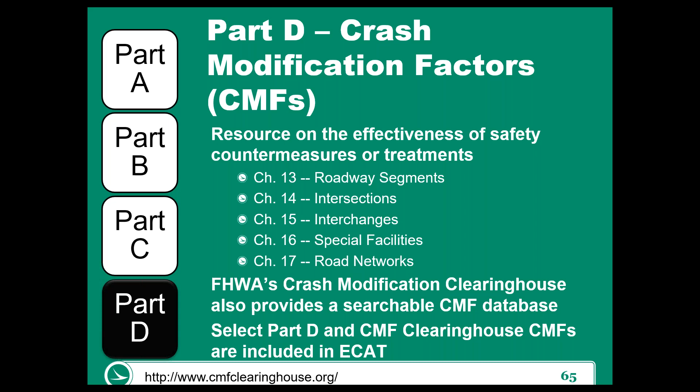But frankly, ODOT's already pulled out the ones that they would like you to use, and they're already in ECAT.

So, real quick conclusion. Why are we so interested in the Highway Safety Manual, and why do we go through it today for those of you who are unfamiliar? Well, the Highway Safety Manual is going to be that tool that informs decisions on expected effects of actions on crashes, changes in design on crashes. The key here, just to reiterate, is it's not a design guidance document. There's no warrants. It's just a tool like the Highway Capacity Manual to help you make decisions. And really, it doesn't make any of those decisions for you.

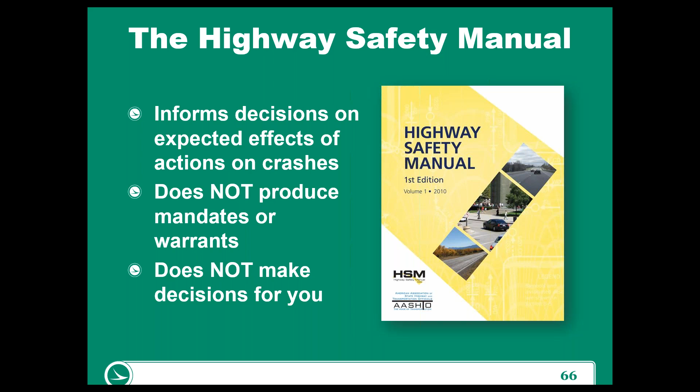And it's important to note, safety is often not the only decision point that you're looking at. So you're still required to take the information from the Highway Safety Manual and use it as one of those data points moving forward.

The development of the Highway Safety Manual 2 is underway. It's going to incorporate relevant ongoing and other research completed since the completion of the HSM1. And we're expecting that it's going to be released within the next few years. And ODOT is already in the process of thinking about how they're going to be incorporating the results of that into their analysis tools. And you will probably get to see ODOT's tools updated ahead of the release of the Highway Safety Manual 2, because ODOT likes to get ahead of those things and wants to be on top of them to get the best analysis process.